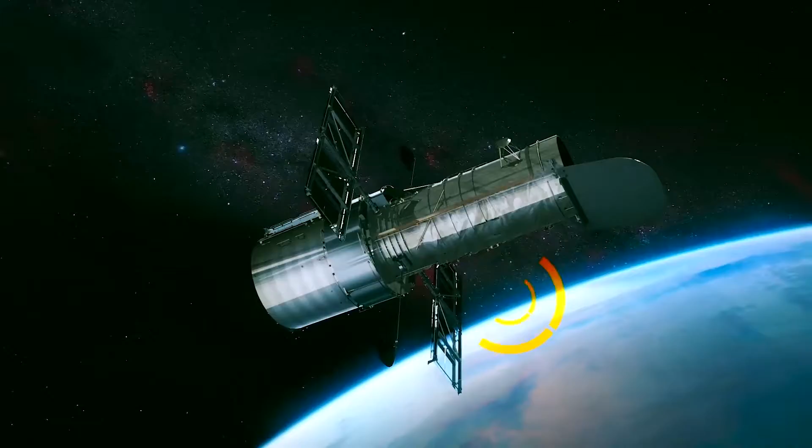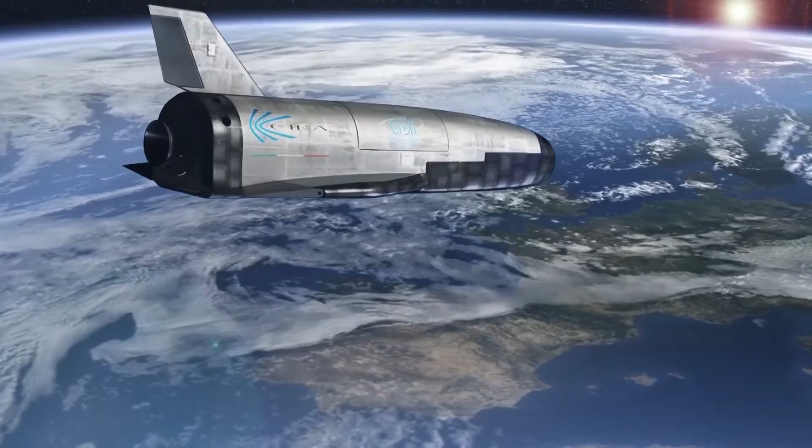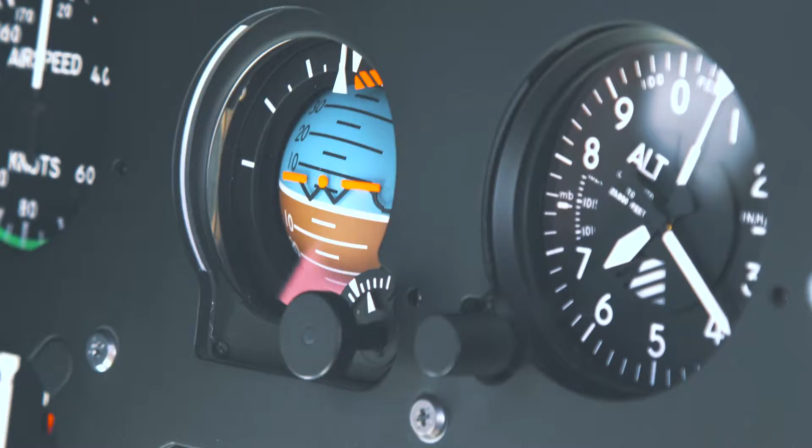Campania Aerospace District, DAC, is the network that gathers the main protagonists in the aerospace sector of Campania region. It aggregates the know-how and expertise of important companies, research centers, and academia of the sector. The Aerospace District aims at a new development model, able to tackle new competitive challenges, leveraging on the consolidation of competencies and the integration of the regional excellencies of the aerospace sector.

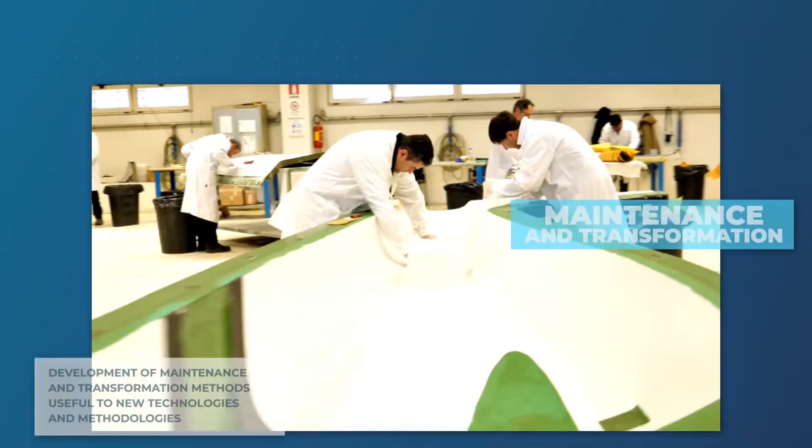Areas of specialization: maintenance and transformation. Development of maintenance and transformation methods useful to new technologies and methodologies.

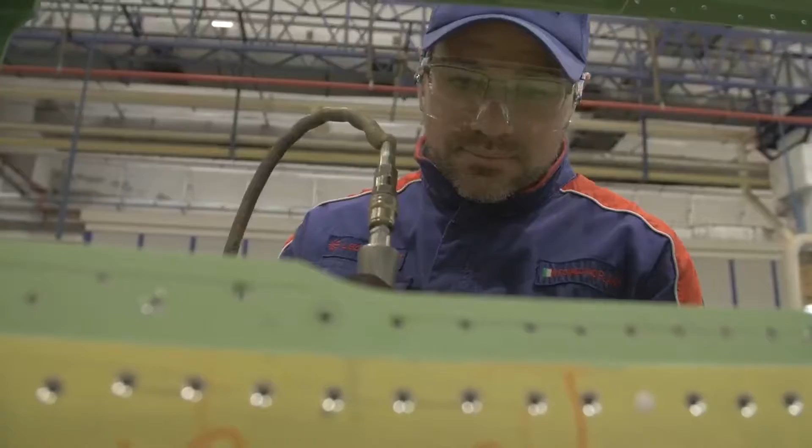Leonardo is one of the most important players globally in developing multi-domain operational capabilities in the aerospace, defense and security sector, and plays a prominent role in major international strategic programs, and is a trusted technological partner of governments, defense agencies, institutions, and enterprises. Innovation, continuous research, digital manufacturing, and sustainability are the cornerstones of Leonardo's business worldwide.

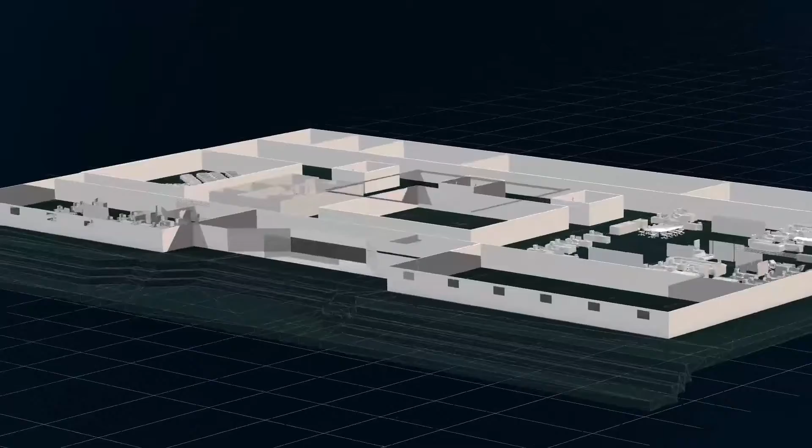The same approach applies for the Aerostructures division that has its roots in the Campania region, where, during the last century, a fundamental part of the aeronautics industry came to life. It's constantly looking at the future, putting in field its best resources to shape and design a future that reflects our values and meets the renewed challenges of the markets.

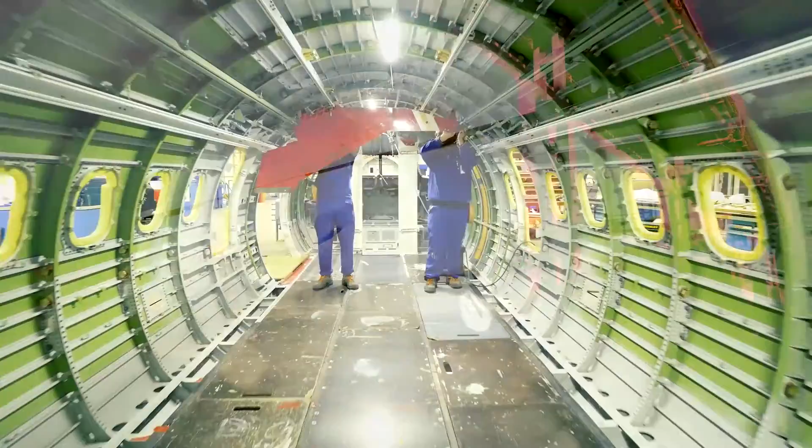In the Campania region, Leonardo also has important helicopters and electronic divisions production sites, contributing synergically with Aerostructures to the region's development and technological progress. The division is a partner of the world's leading commercial aircraft manufacturers, specialized in the production and assembly of major structural, composite and metallic components for commercial and military aircraft, helicopters, and unmanned aircraft.

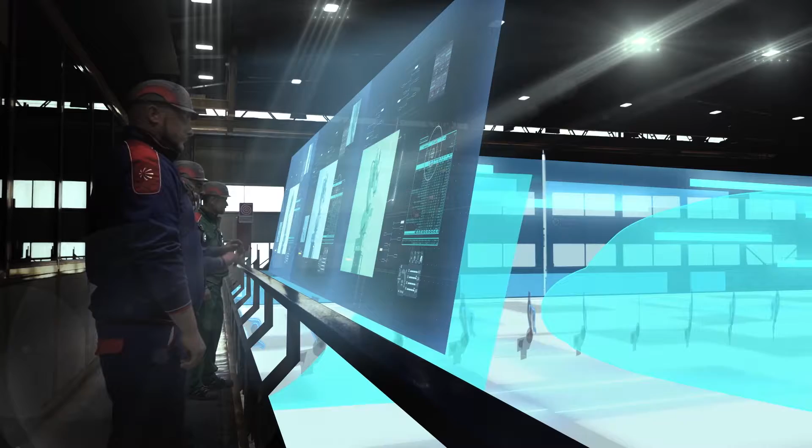Leonardo participates in the most prominent programs in the sector, such as the Boeing 787 Dreamliner, the Airbus A220 and A321, and the best-selling regional turboprops produced by ATR, with 1,800 aircraft delivered in its first 40 years of history.

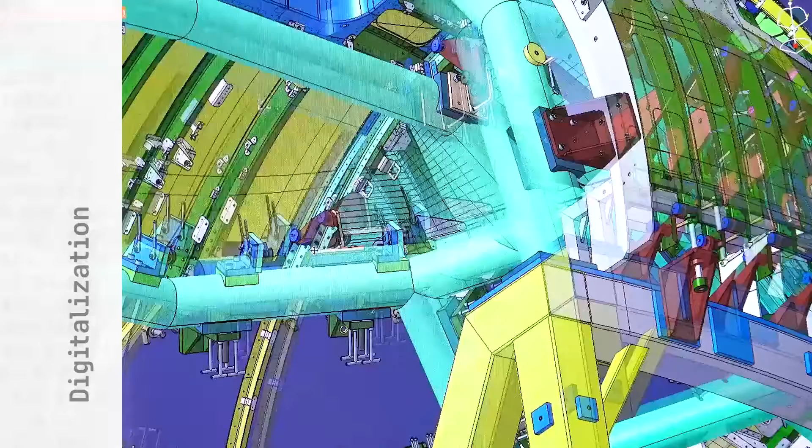Continuous innovation that brought the development of composite materials years ago is now leading us to the construction of a new concept of factory, the smart factory. Digitalizing processes, engaging intelligent machinery, cutting costs and production times, where the human factor is always the center of the whole process, and is the element that makes the difference.

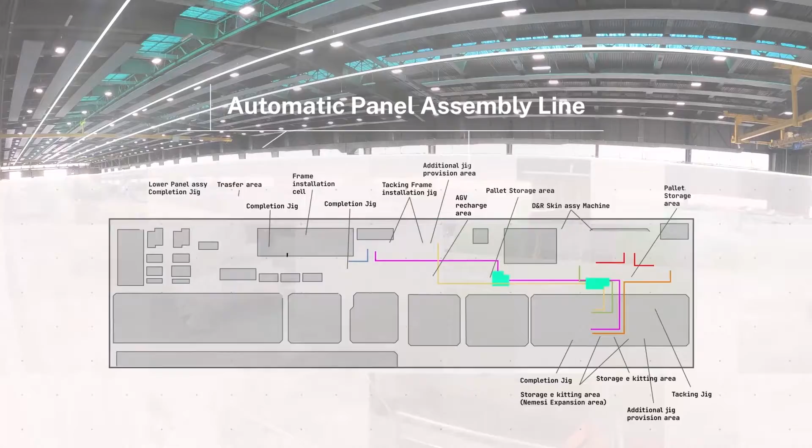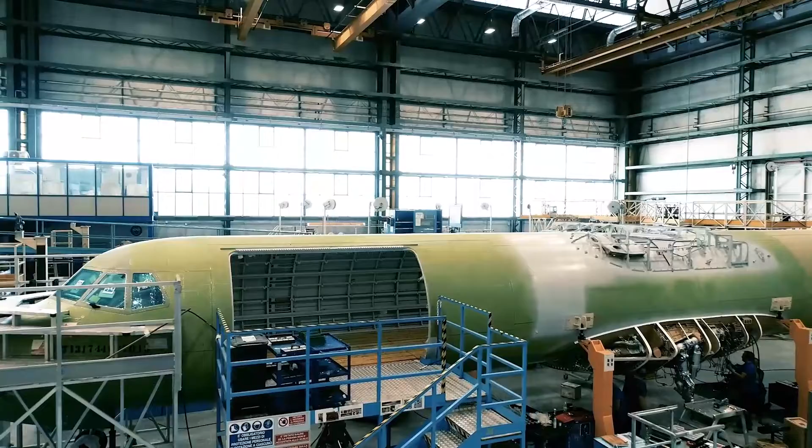Also for Aerostructures, the vision of Leonardo is projected toward the future: new technology development, new materials, and new research and development processes. It's an established practice in our production sites, strengthened and enriched by investing in young, talented students from the Campania region through important investments in Leonardo Labs and the Aerotech campus in Pomigliano, at the same time training sites for young engineers and a forge of new ideas.

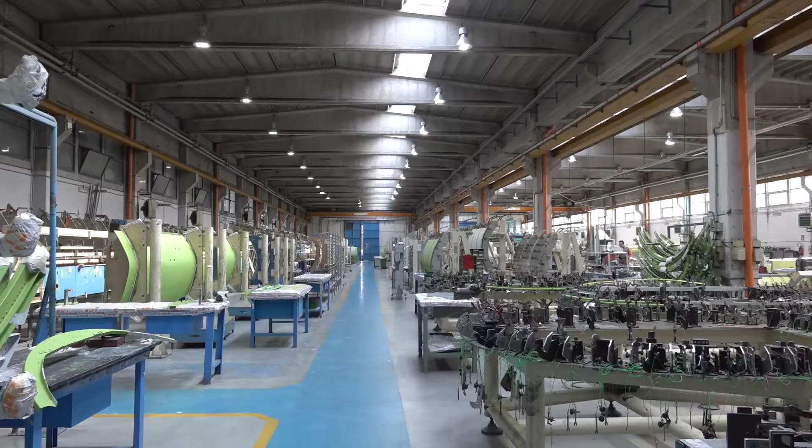Good morning. Today we are at Lyre SPA. Lyre is an aeronautical company. We've been founded over 30 years ago, and we are based in the Naples area.

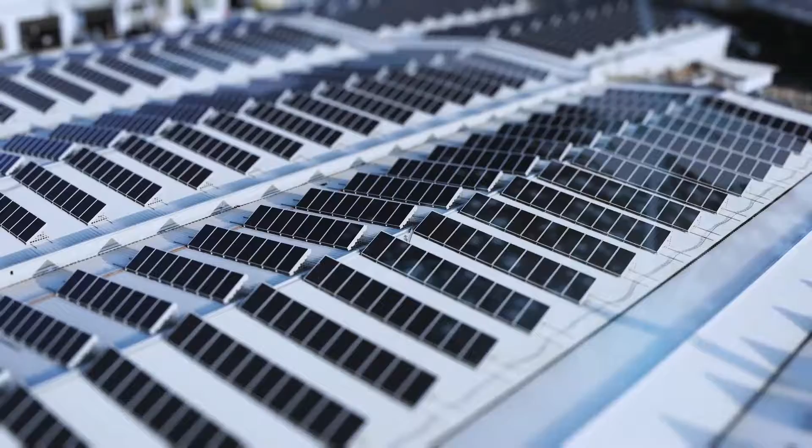We are mainly based less than 40 kilometers from Naples, and we are specialized in the design and production of complex aeronautical aerostructures. We go from small panels up to large structures of the aircraft, up to the entire barrel, and also a full fuselage of business aircraft.

We are now in the final assembly line of Lyre in Airola. That's the final assembly line where everything comes together and all the parts are then assembled into the final product. We take responsibility for building each single part and the final assembly of the parts, and we are fully certified and qualified by our customer, the final customer.

Our production is mainly, we are fully committed to delivering to our customer the final product. We produce for the ATR 42 and 72 the center barrel of the fuselage, divided into 8 panels.

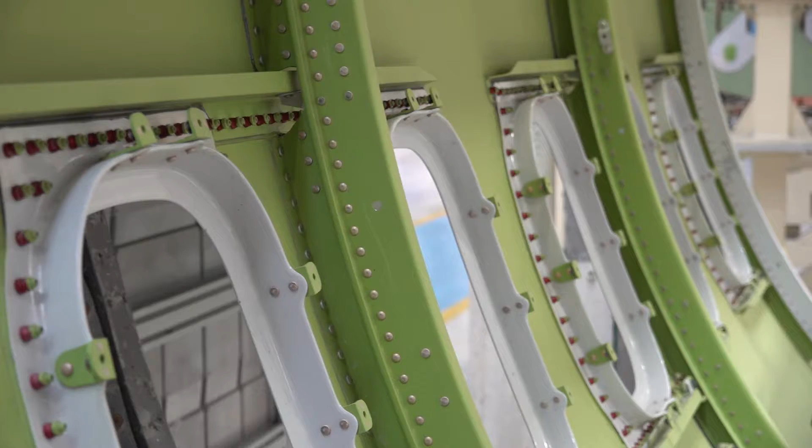And for the A321, we produce the door surround assembly. We also produce a large structure for the military aircraft C-27J.

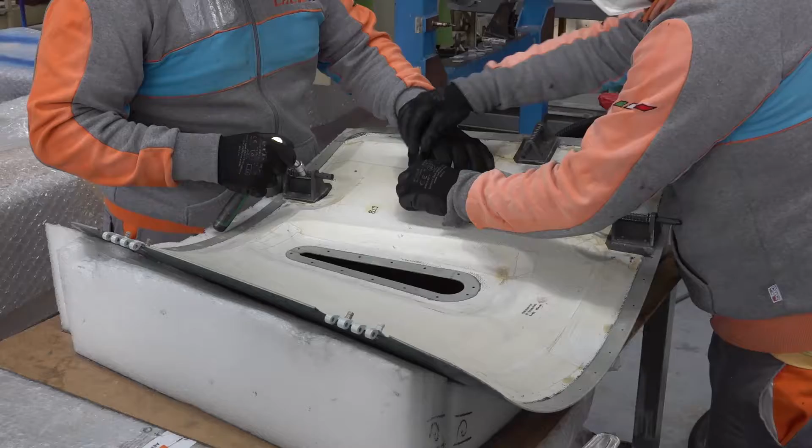Beyond that, we also produce a lot of main structure, what we call primary structure. Those are the structures which are supposed to carry primary loads, and therefore need to be certified, and those structures are physically made here.

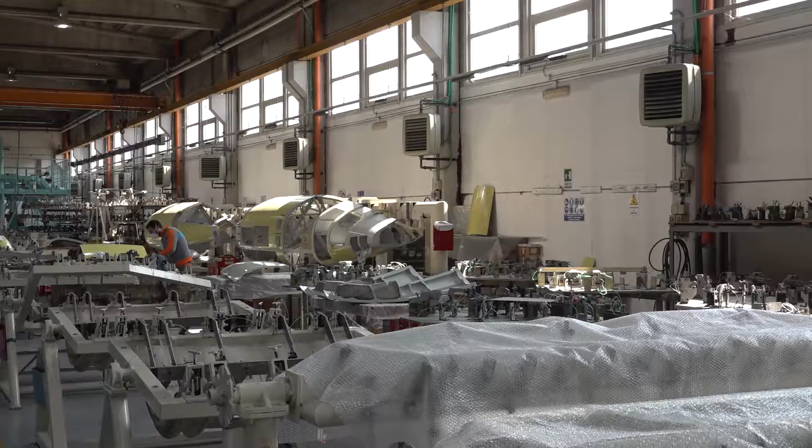So we design the entire production line of the complex assembly, starting from the development of the assembly line, going back to the development of each single tool that is required for the production of each single part.

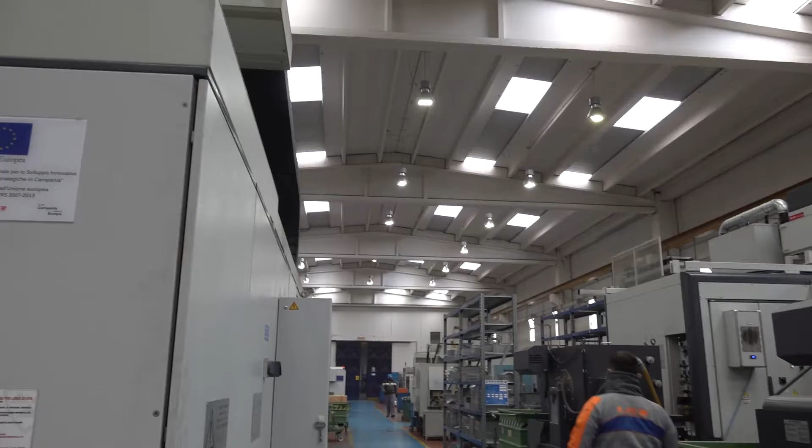We are based here, and this is our headquarters. This is our historical plant, where we have all our offices, administration, and purchasing.

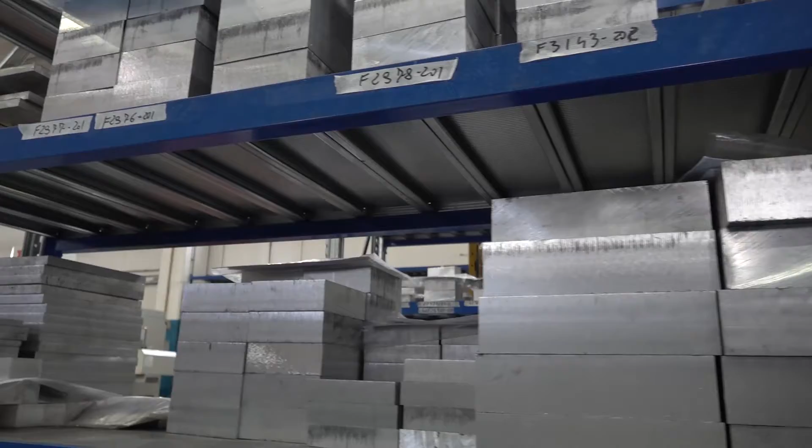We are a fully vertically integrated company, which means we take care of the entire process, even purchasing of the material and our supply chain. We have a very strong supply chain, most of them based in the Naples area and in the Campania region.

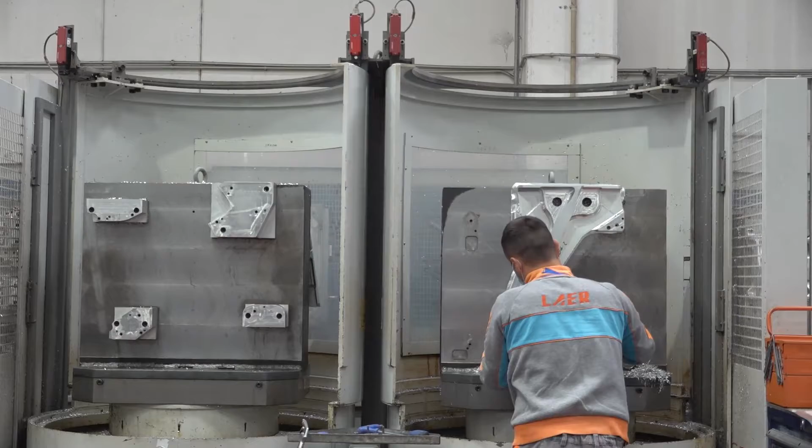We maintain in-house the production of the very critical parts, but we are very specialized in the aerostructures market.

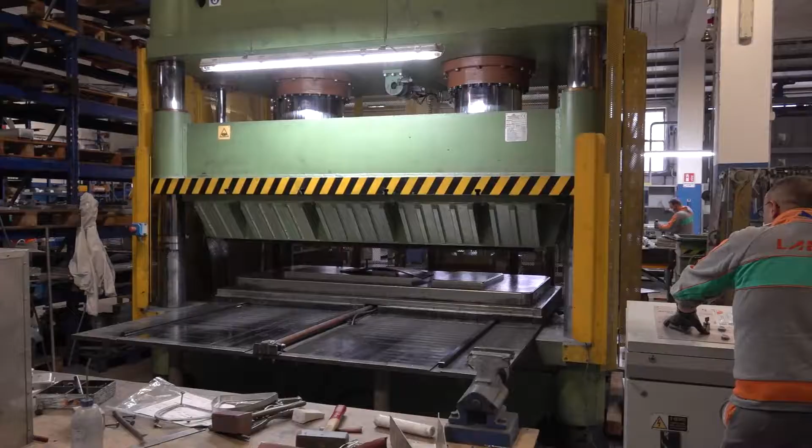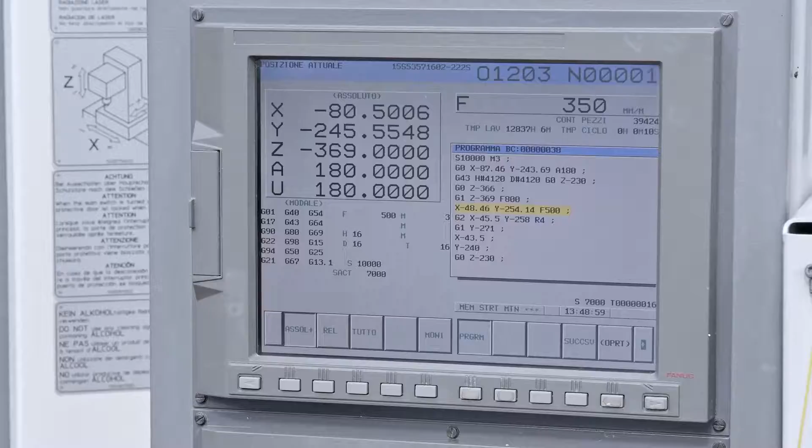Over the last year, everybody in the world has been penalized by the pandemic crisis. We all know about that. But we also know that the companies that will survive this crisis will be the ones that are stronger. And we want to be one of those.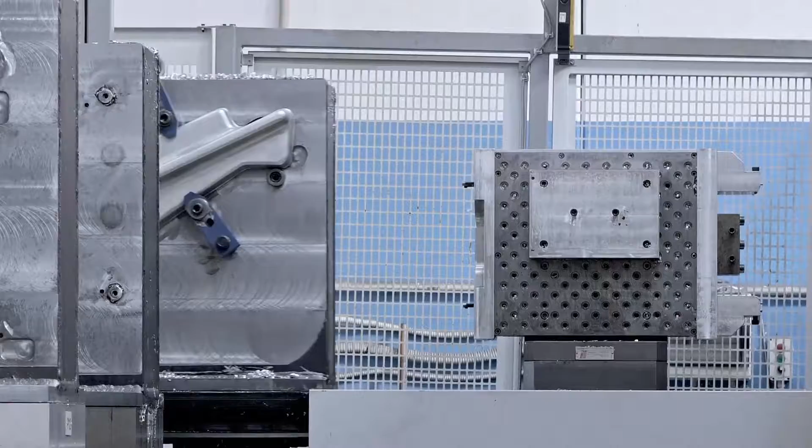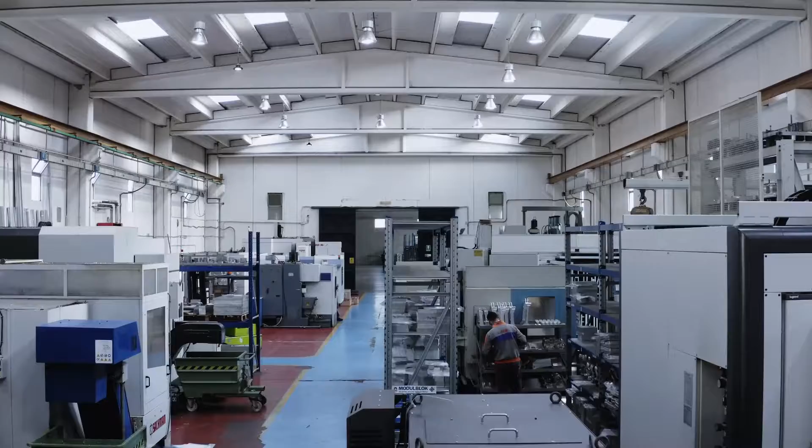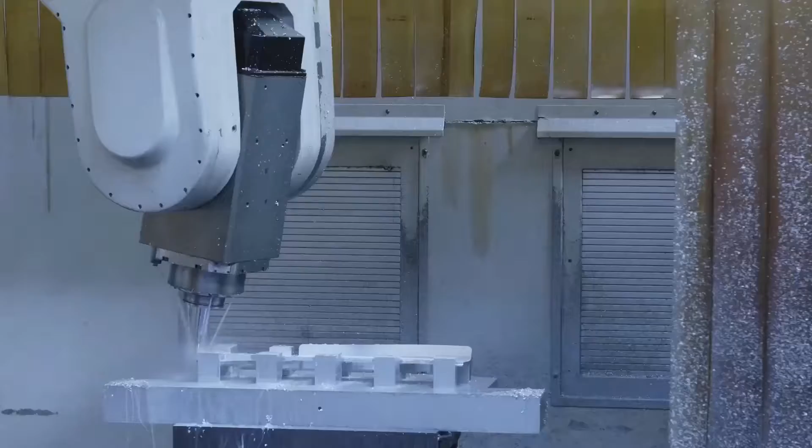We kept going with our industrial plan that we set up three years ago. Even during this pandemic crisis, we've been on the market checking the situation over the world. Because we are still pursuing our target of becoming a bigger company, we are now based on three plants, two in Naples and one in the north. And very recently, we've been able to win a very important bid for the conversion of the Boeing 777 ERSF from civil aircraft to cargo version.

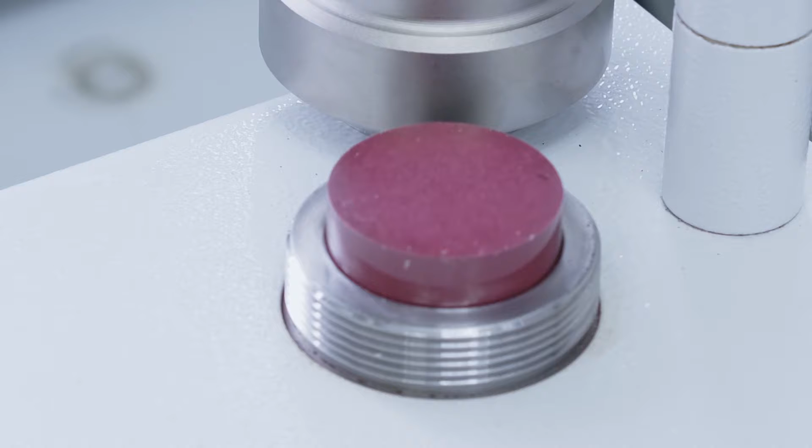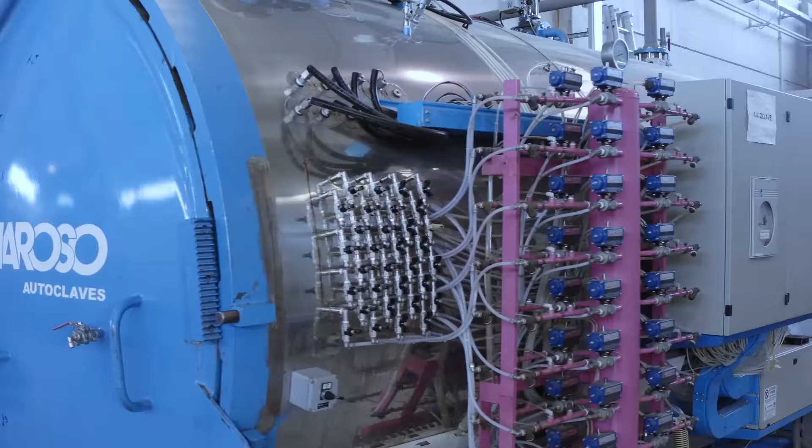Our final customer is based in Israel, and they're the leading company in the conversion of civil aircraft into freighter aircraft. This is a huge bid, a huge program, and it will have a very strong impact on our company, but this is well within our capability, and this is absolutely what we wanted in the development of our industrial plan. This is going to happen very shortly.

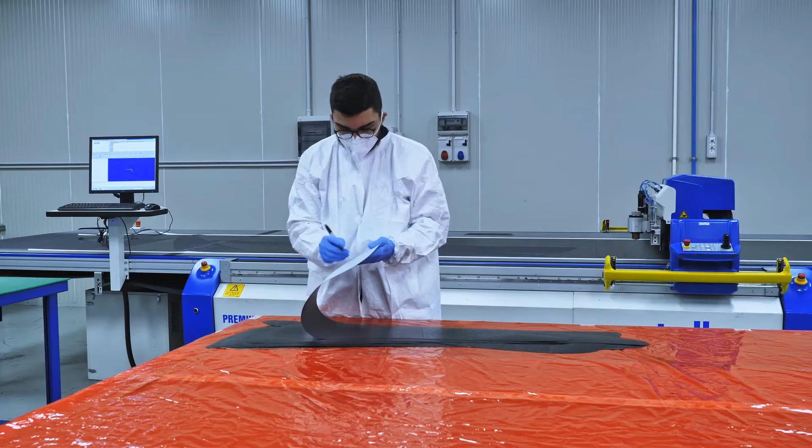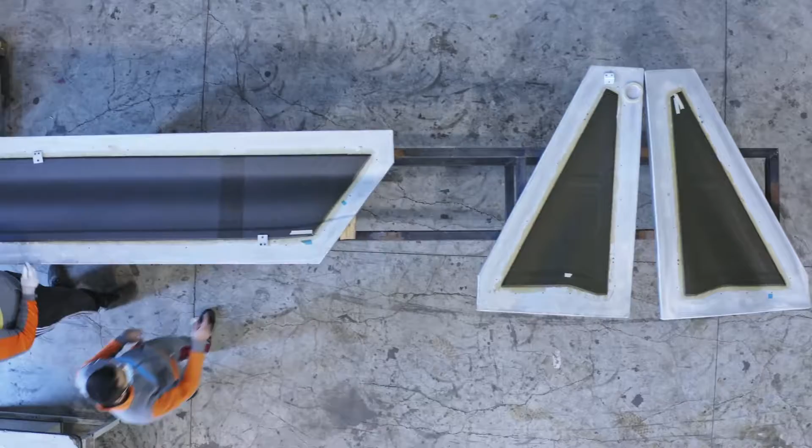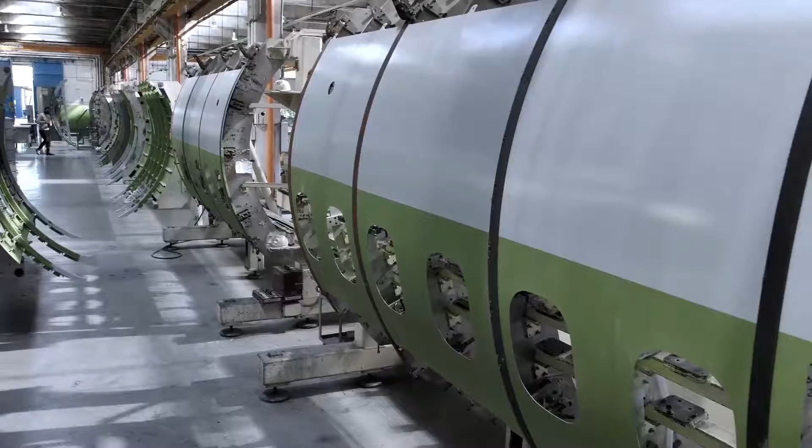We're already working hard to do that. This will change a lot of our infrastructure and a lot of our assets. We have been investing a lot in assets and in human resources for sustaining this program. This should bring our overall invoice three times more than current invoice. So we're very proud of that, and we're very proud of the fact that our final customer believed in us.

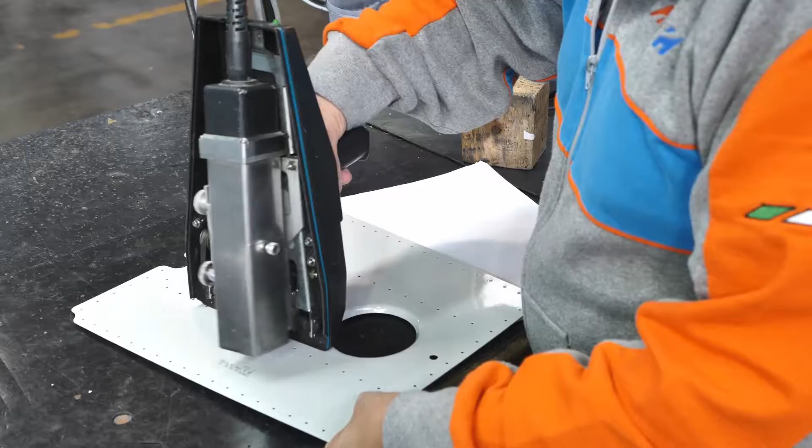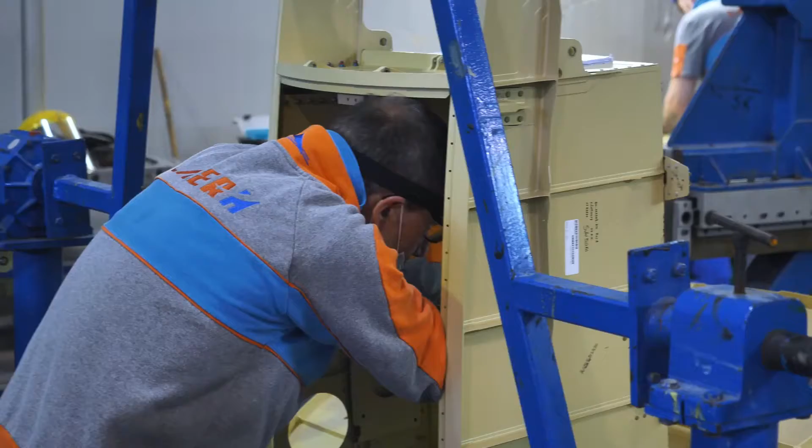LAER belongs to the DAC, which is Campania Aeronautical District. We believe that our region, Campania, does have full capability and full capacity of designing and producing even a brand new aircraft. And we are ready to sustain our region in further opportunities that may come.

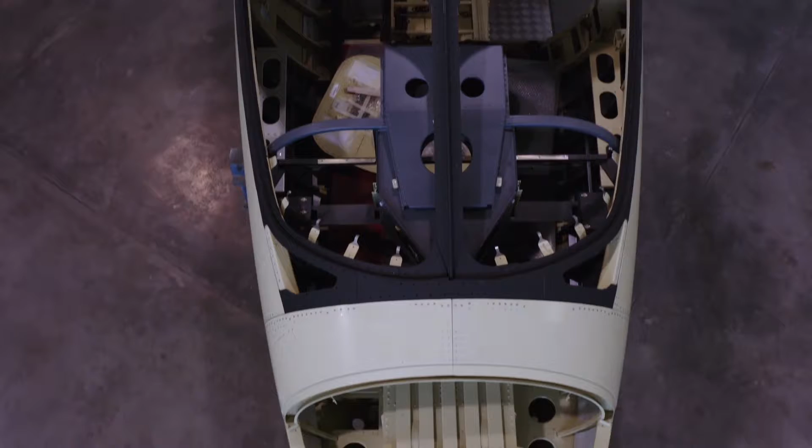We strongly believe that we have the capability as a region to face new opportunities and new challenges in the aeronautic business, especially now that everything is changing. We have to think to be more creative, and I think we could all do that together, and we could propose different solutions for the current and next transportation requirements.

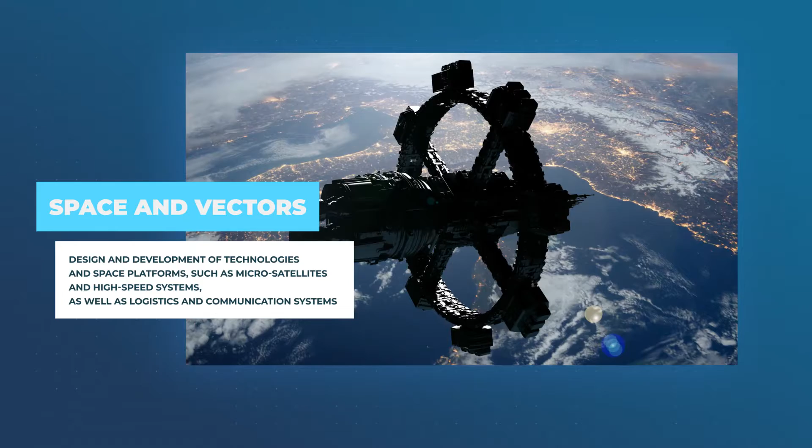Areas of specialization: space and vectors, design and development of technologies and space platforms such as microsatellites and high-speed systems, as well as logistics and communication systems. SAB Aerospace is a private, independent Italian SME born in Benevento in 2004. Since the beginning, the company started cooperation with universities, local universities, and research institutes. The core business of the company is the development, design, manufacturing and testing of mechanical structures in metal and in composite for space application.

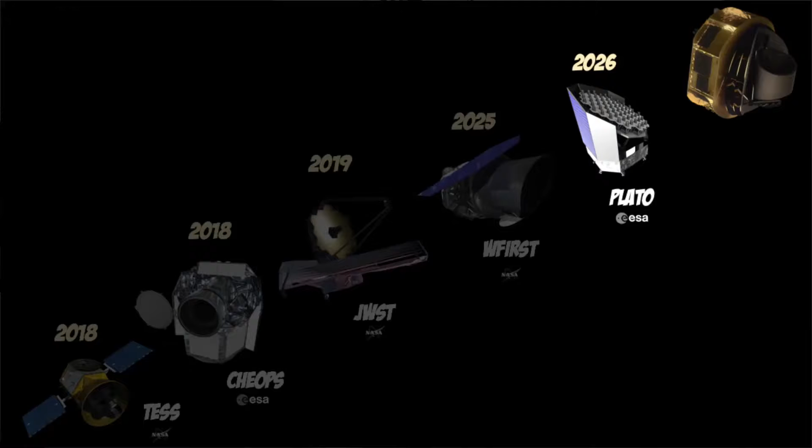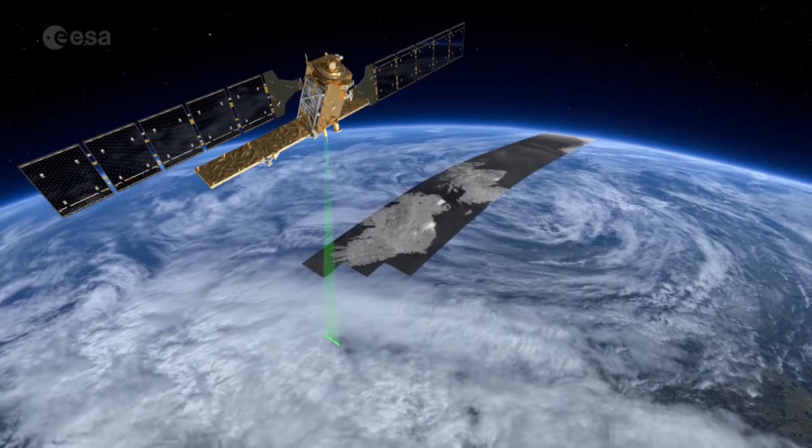We develop structures for satellites, primary structures for satellites, and dispensers and adapters for launchers, for Vega for example. Currently, we are working on a very ambitious program. We support the Plato satellite development. It's a satellite of the European Space Agency, and it's a very challenging program due to the very stringent requirements. It's a satellite for deep space.

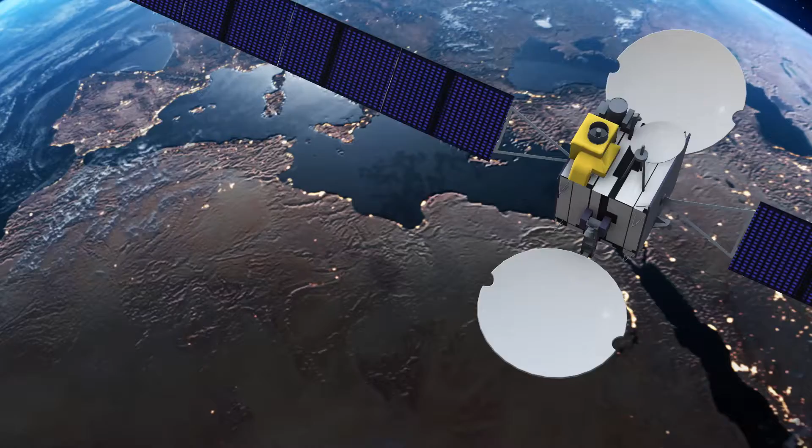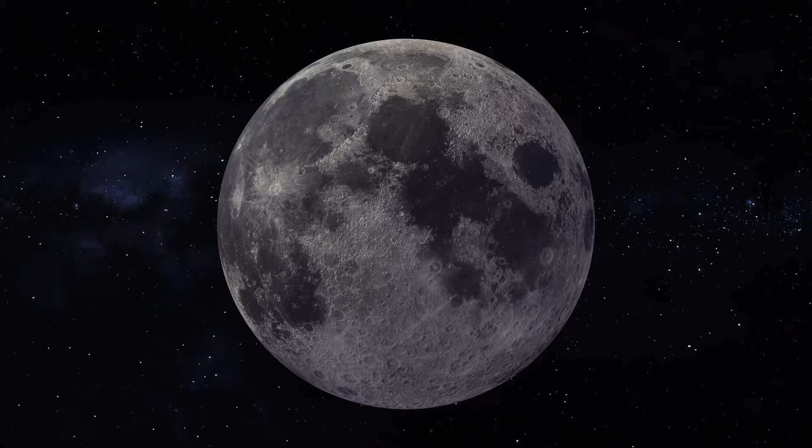SAB Aerospace is responsible for the development of the primary structure and the thermal control system of ROSE-L. ROSE-L is a satellite of the European Space Agency, and our customer is Thales Alenia Space Italy. For Thales Alenia Space, we are developing the International Habitat Launch Vehicle Adapter. The International Habitat is an element of the ESA lunar gateway, and the Launch Vehicle Adapter is a mechanical component that will permit the International Habitat to dock to the launch vehicle during launch.

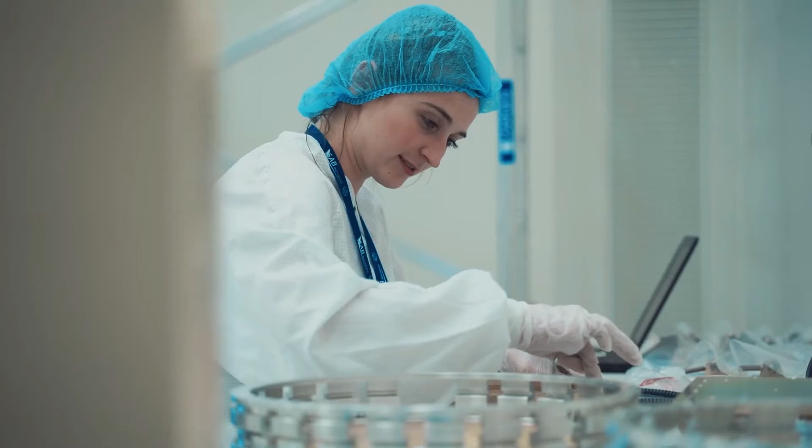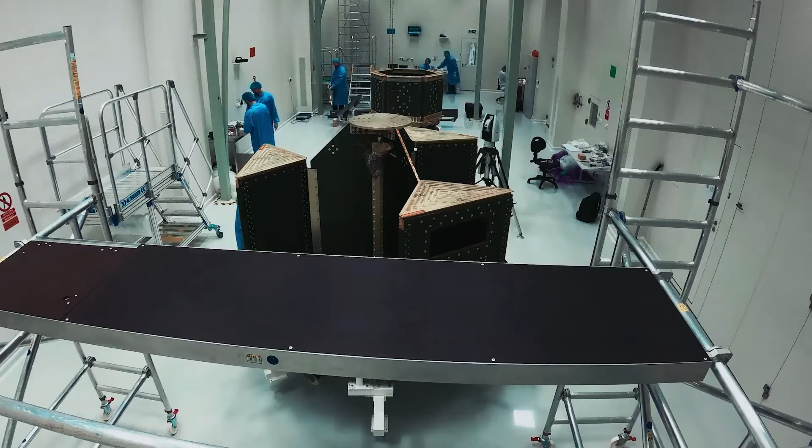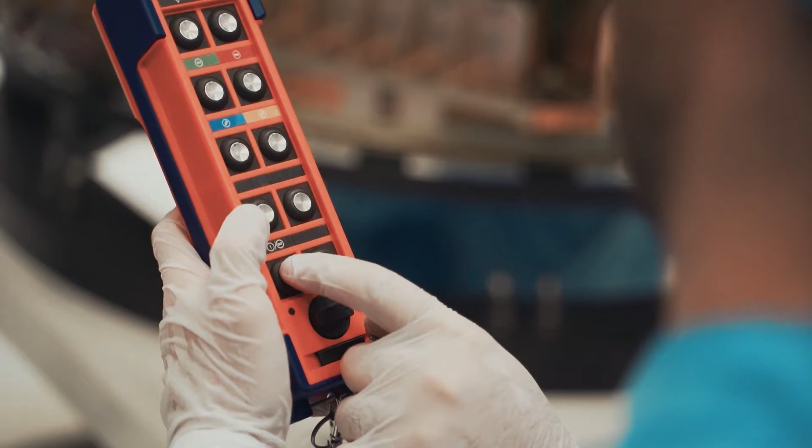SAB Aerospace has been responsible for the development of the small spacecraft mission service dispenser, which has been used to launch several satellites with Vega. This dispenser is what we call a bus to space, because in the past launches have been performed like a taxi, with only one passenger who paid the complete journey to space. With SSMS, it is possible to share the ticket for the launch, the price of the launch. So there is the possibility for small players, universities and small companies to launch their own satellite using SSMS, due to the fact that the price for the launch is shared between the passengers. This is the reason why we call it bus to space.

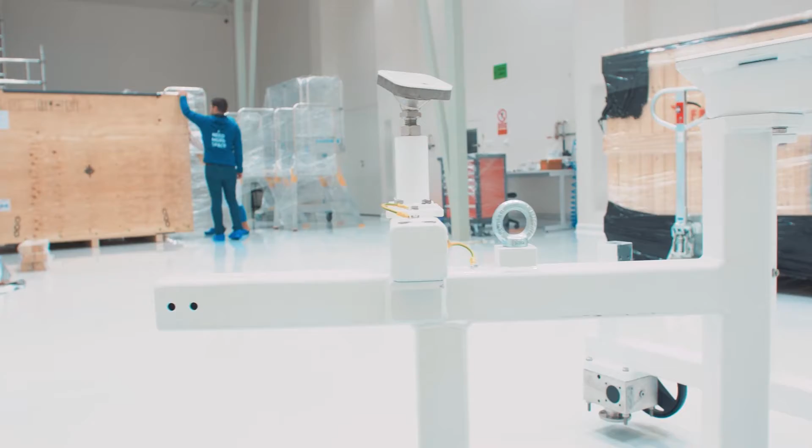Of course, thanks to the AVUM, which is the fourth stage of Vega, it is possible to be separated at different moments during the launch, and this is a unique opportunity using SSMS and the AVUM of the Vega launcher.

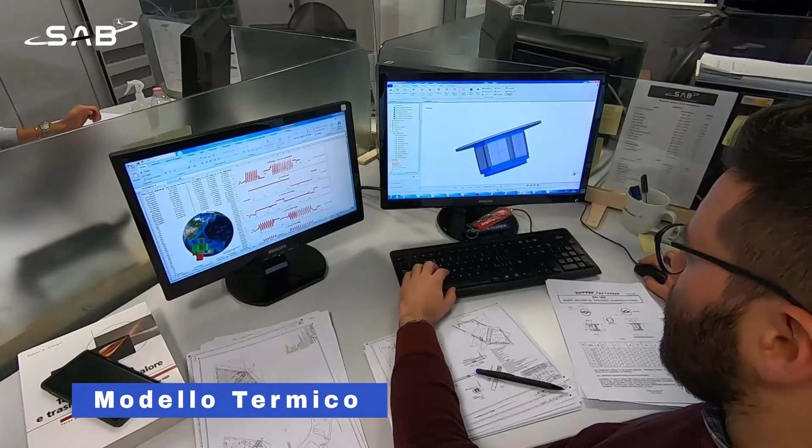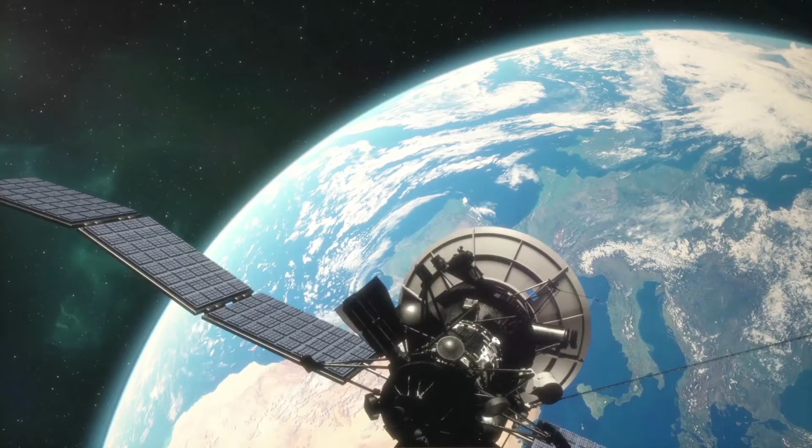SAB Aerospace is a member of the Aerospace District of the Campania region, called DAC. This is very important for us, because we think it is not possible to plan a future remaining alone in this business. It is very important to share projects with other companies, and I think in the Campania region there are a lot of companies with the capacity and know-how to build up a small space system that can really be developed using the know-how of all the several companies in the Campania region.

In addition to that, we managed to use regional and local funding to develop our product. In the space business, it's very important to use this help for research, because research is a very important component for us — each time we start a new project, there is always an initial period where we make research. So if we have this help, it is very important for the development of a product.